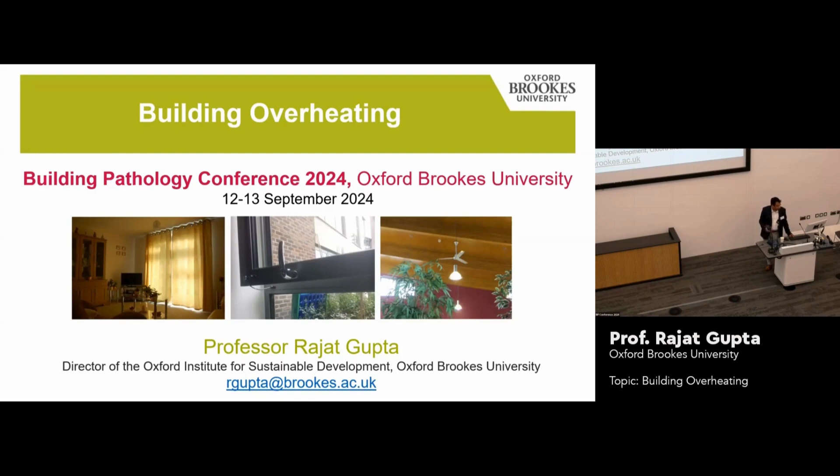I've been researching this for many years now, and I'd like to share some of those findings. I'll give some background on what overheating is, try to define it and give you metrics. Interestingly, we don't have a consensus on overheating yet, on what the definition is exactly. I'll take you through some research, then talk about some measures for tackling overheating, and suggest ways of integrating and assessing overheating risk through building pathology, because I think there's a very strong link now between the two.

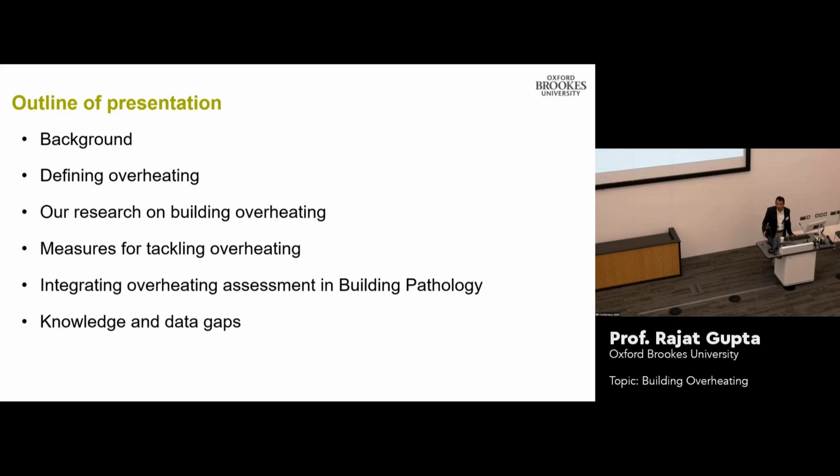I come from the field of building performance evaluation, and it's great to see Bill Bordass sitting just opposite me - I've learned a lot from him. We've applied those approaches to building overheating as well. I want to end with some knowledge and data gaps, because you're here for a couple of days and it's worth thinking about what gaps we need to address.

I run the Oxford Institute for Sustainable Development, and I'm leading the low carbon building research group. One of our areas of work for nearly 15 years now has been climate change adaptation, and what we try to do is focus on building overheating there.

We measure and model the risk of overheating, currently and in the future, both for retrofitted and existing buildings. We try to understand the factors that affect overheating - whether they are physical factors, human factors, or institutional factors.

Apart from studying homes and offices, over the last 8 years I've been looking at care homes with colleagues in University College London and London School of Hygiene and Tropical Medicine. Recently, and even now, I'm seconded partially to the Ministry of Justice to look at prisons - again a very hard to reach, difficult setting where the links between overheating and violence become very important.

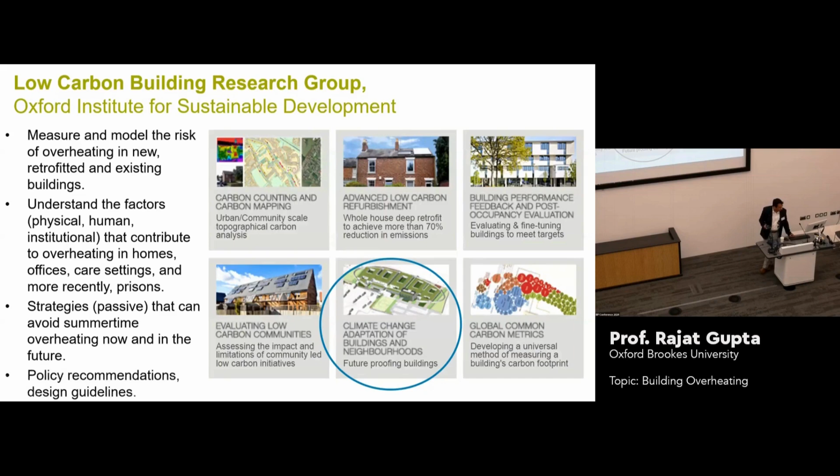So this is, as I said, a very key risk for buildings and for population groups, and we suggest strategies to tackle overheating. Being an architect, I'm all for building-related passive design first, not air conditioning at all, obviously - now and in the future - and then we look at policy recommendations and design guidelines.

We've had a body of work, and I'm mentioning that because some of you might be interested - there might be PhD students here who want to go through some of it. We started a journey in 2009 with an EPSRC project on climate change adaptation of suburban neighborhoods, where most of the UK population tends to live, looking at how you adapt those in Oxford, Bristol, and Stockport.

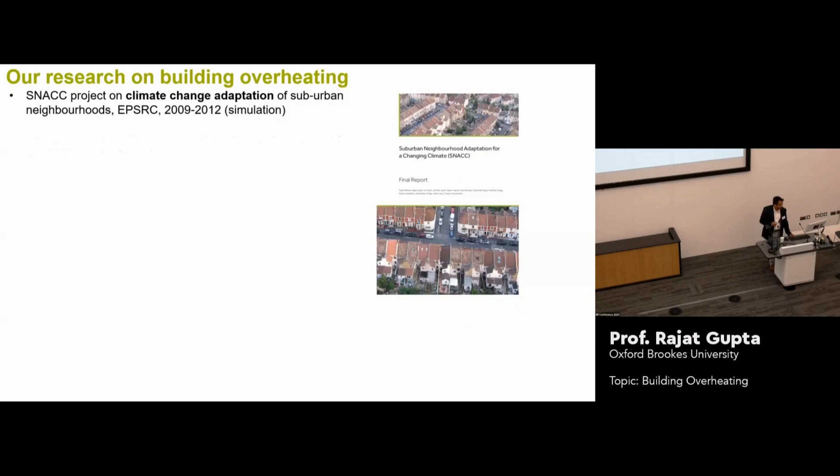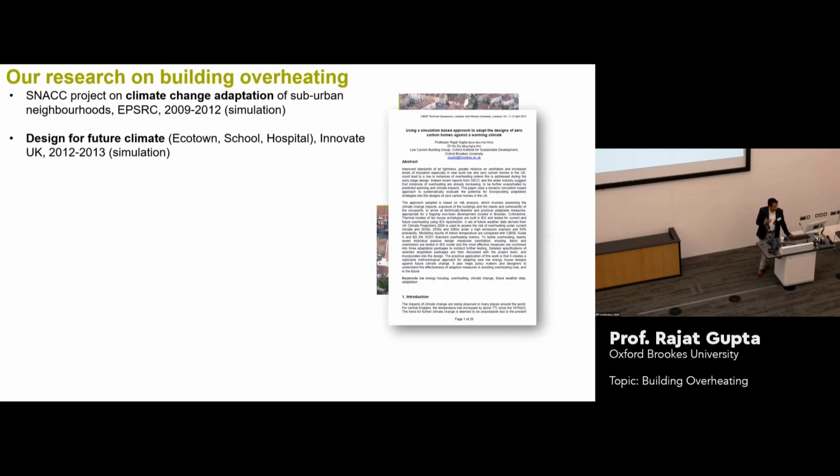We used some of that knowledge - some of you may be involved in the Innovate UK Design for Future Climate program, which I thought was very visionary because it brought a number of stakeholders together thinking about these issues right at the design stage. We worked with Bristol Ecotown, hospitals, and schools, trying to design them with climate resilience integrated.

We started to look at empirical assessment of overheating across social housing, for example, through a building performance evaluation program, and then moved on to care and extra-care settings. The care sector is really important because most of the deaths that occur during a heat wave are amongst older people above 65 years, and most of them are based in care settings - a very vulnerable sector that gets disproportionately affected by heat.

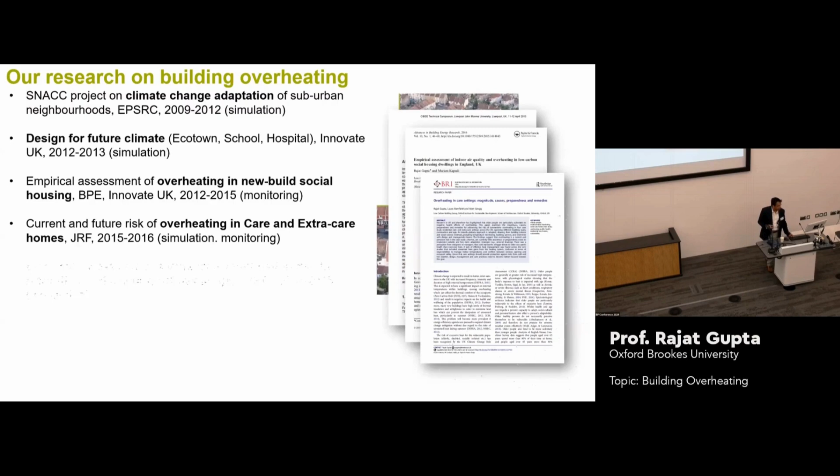We've also been looking at what happens in retrofitted and existing dwellings, because sometimes insulation without ventilation can lead to more problems than solutions.

We also have probably the largest care settings project, working with UCL and LSHTM, where we have the national stock of care homes. So if any of you are designing care homes or interested in it, there is a building stock model now. We've monitored 50 care homes just after COVID. Currently I'm involved in overheating prisons, and we're starting a new project looking at extra care settings, linking heat with health. That's the main focus now.

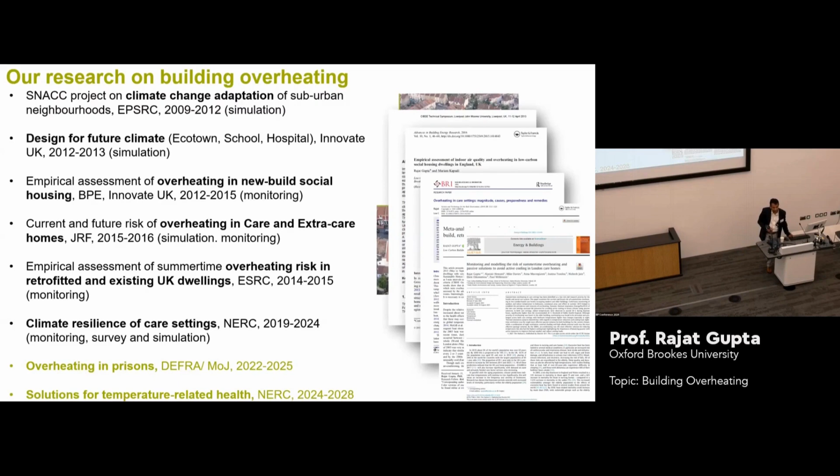We also have potential good news about a very large grant, which unfortunately I can't announce because UKRI hasn't announced it yet. But there will be a lot of work happening in this space now, especially linking these aspects.

I want to touch upon why this matters, why building overheating has been put right at the front of the agenda of the conference. Because overheating, both in new and existing dwellings and buildings, is increasing even in temperate climates. I think there is a myth that in the UK, which is a heating-dominated climate, summertime overheating doesn't matter. Actually it does. In fact, in care settings we are even observing wintertime overheating, and this is a major issue. And of course that has energy wastage and other net zero implications. Changing climate will make it much worse.

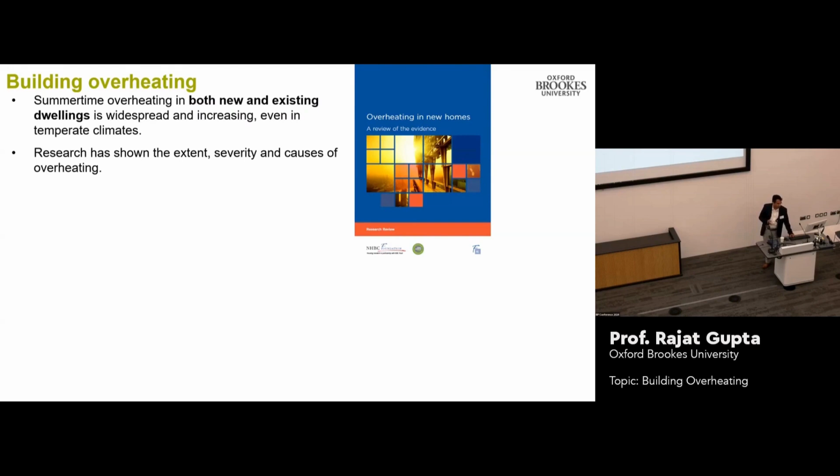We know that the extent, severity, and causes of overheating are being researched. This will become, as I said, with a warming climate, much worse. A number of reports from BEIS and ARUP are emphasizing this. A recent BEIS report said that domestic stock will require 75 to 85% of cooling energy consumption if it is not adapted for overheating.

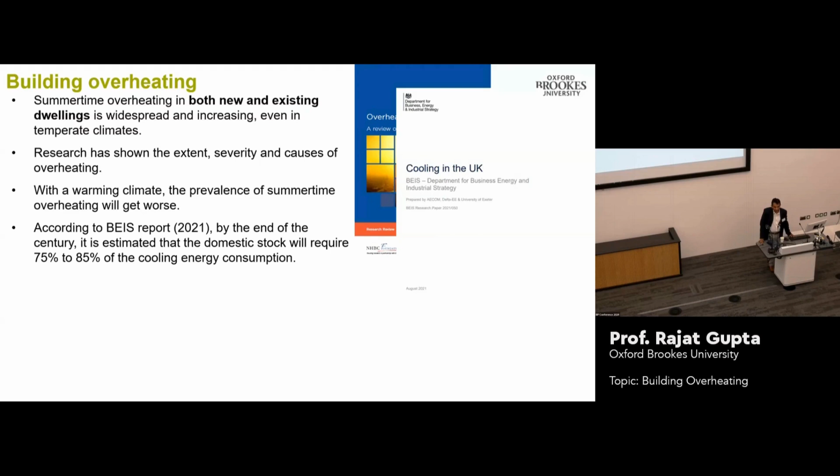When we had the summer 2022 heat wave in July, UK energy use rose by 5% during the peak period, which is quite alarming, because if that continues, you can imagine we are in a very different state. A recent ARUP report said 9 out of 10 UK homes will overheat if there is a 2-degree warming, which is probably happening now.

We're already at 1.8 degrees, so this isn't the future, this is probably the present. We know smaller houses and flats are at greatest risk. And most importantly, overheating is a public health issue. This affects mortality, it affects morbidity, and the elderly and vulnerable population - the very young, the very old, those with underlying health conditions, pregnant ladies, those occupying captive environments - are most affected.

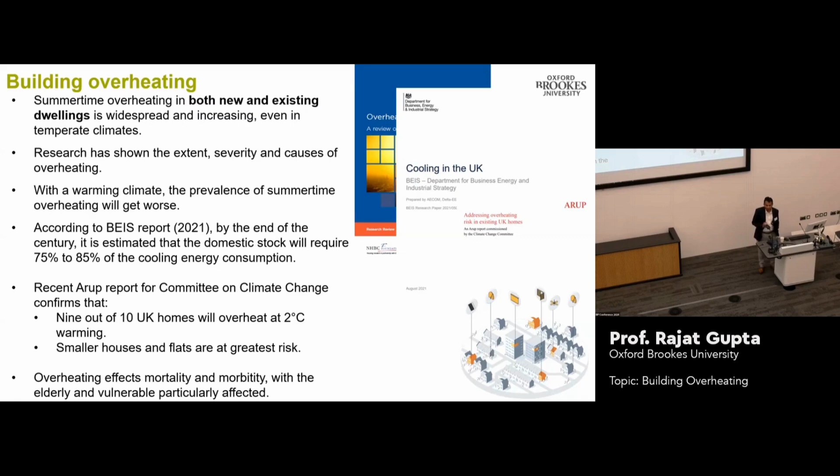There's a link between overheating and energy retrofits, because although we should do that for net zero and other reasons, this can sometimes accentuate the risk of overheating if not done properly. If there's not adequate ventilation, if you have single aspect with communal heating systems which are not well insulated, and of course lack of shading is a big issue. Even homes nowadays are going up without any shading whatsoever - and I mean external shading here.

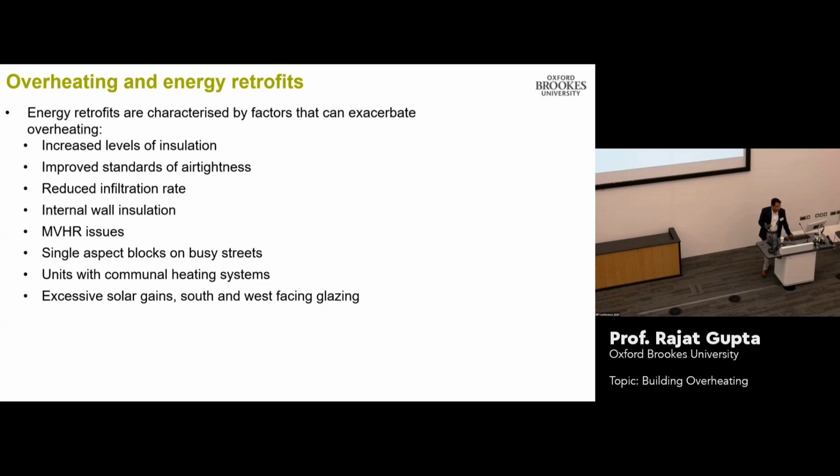We know there's some work here, some guidance, primarily looking at new build, in building regulations, Part O. The Committee on Climate Change has very clearly said that there is little incentive still to retrofit adaptation measures to reduce overheating across the building stock. So hardly any retrofit projects ever look at climate resilience. I haven't seen one - if you have, please let me know. It's very rare, and this needs to be built in.

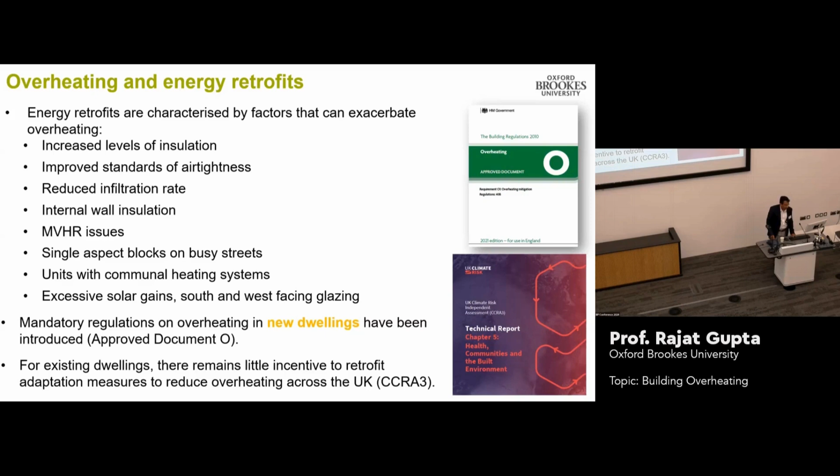Now, as we start on this large-scale transformation of our building stock, despite all this, we don't have a clear definition of overheating. There are a lot of metrics, but there's no consensus. It has come from the work of Fergus Nicol, who is a leading light in comfort. So the absence of comfort, or the presence of discomfort, has been seen as overheating, using the thermal comfort field studies work. There are lots of other guidance now.

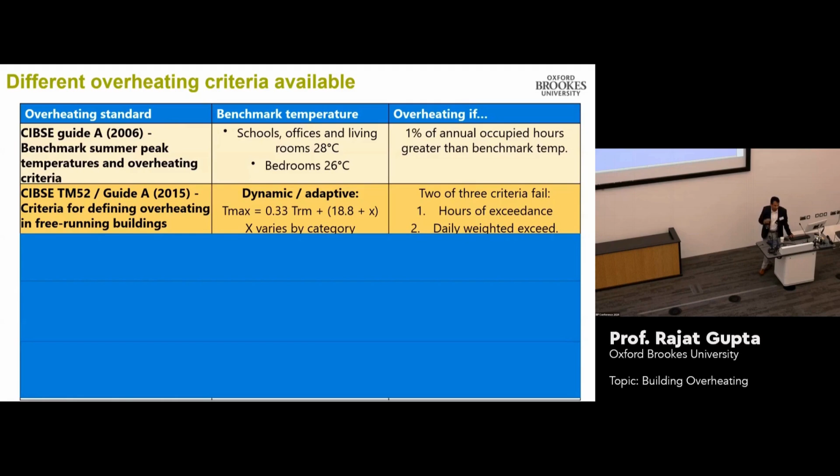You may be aware of CIBSE Guide A, which talks about static criteria - offices, living rooms above 28 degrees, or bedrooms above 26, for a certain percentage of occupied hours are deemed to be overheated. There's more dynamic criteria because buildings perform as per outside temperature. So there are criteria based on TM52, which looks at the indoor threshold based on the running mean outdoor temperatures, and is more forgiving, looking at hours of exceedance as well.

SAP has still got a very basic criteria of overheating assessment. The Passive House Planning Package looks at 25 degrees and 10% occupied hours, although that's also being reviewed now. And there's the Housing Health and Safety Rating System, which also has that 25 degree threshold. From the UK Health Security Agency, 26 degrees is what is seen as a threshold.

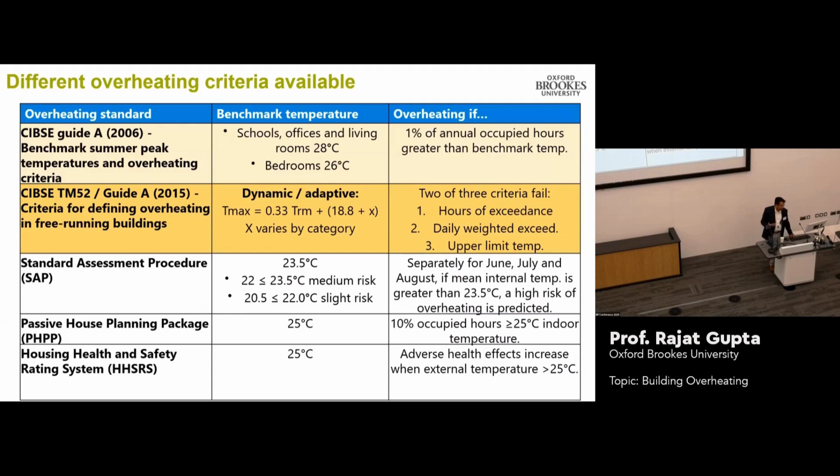But that cannot be used for all vulnerable settings. In an environment where people are in rooms for 18 hours a day, or in settings where people are bed-bound, 26 degrees might be too late. We might need something different.

So at the moment, what tends to be widely used is this guidance called TM59, which is really saying that overheating is based on comfort in living rooms and bedrooms, so that sleep is not disrupted. Sleep has become a key indicator because bedrooms have been found to overheat quite a bit. And they have two slightly different criteria. Bedrooms use the static criteria because it's related to sleeping, so you're not able to adapt that much.

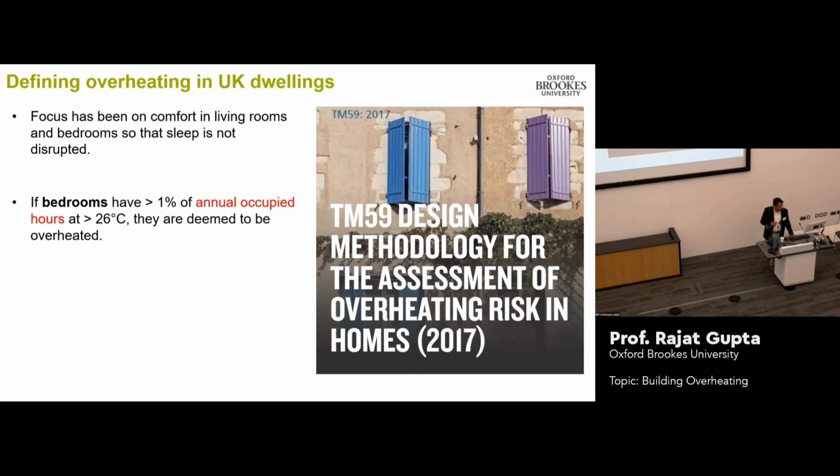What it's saying is that if 1% of annual occupied hours are above 26 degrees Celsius, they are deemed to be overheated. For living rooms, it tends to be more dynamic, using the criteria of internal temperatures being determined by outdoor temperatures, via the running mean outdoor temperature. If 3% of occupied hours between May and September exceed this threshold, the space is deemed overheated. So essentially, it's putting in some adaptation measures that could apply because you're in the living room and probably awake. But in the bedroom, it tends to be slightly more static. So those are the ones that tend to be mostly used.

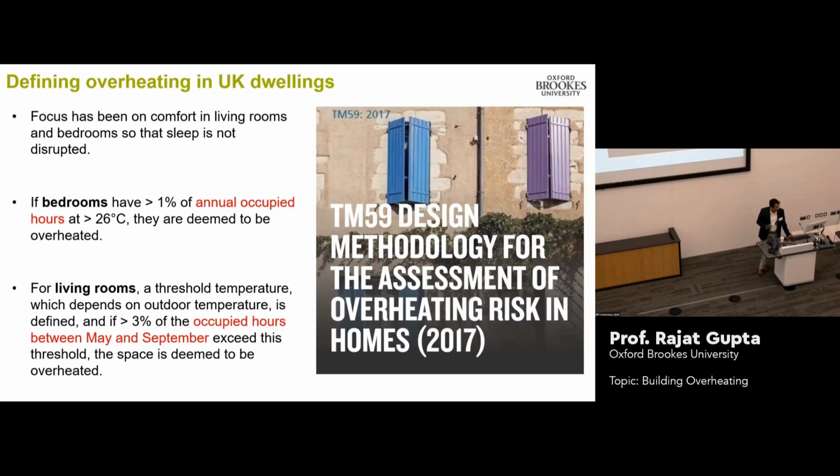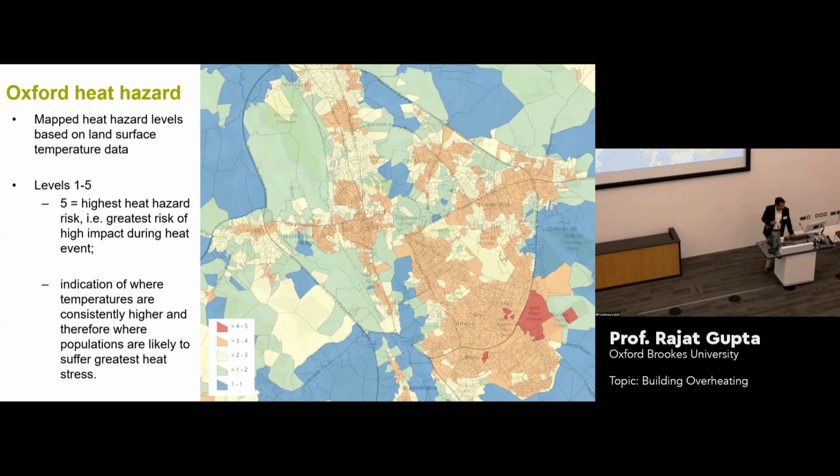Oxfordshire, I was told, had 65 deaths, not this summer but in summer 2022, excess deaths due to the summer heat waves. We've also been predicting what happens in the future.

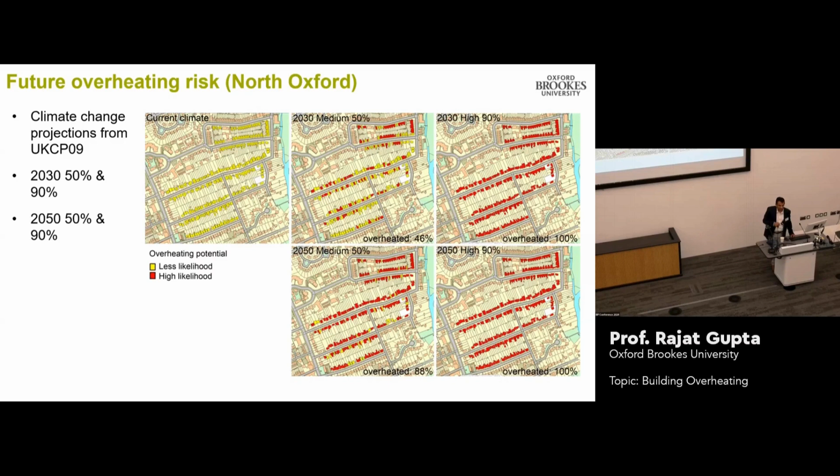Looking at North Oxford, the red shows which homes will overheat as we go into the 2030s. This is using the high emission scenario from UKCP09, which is probably much conservative—it's probably happening now, everything is getting overheated. So this is a current risk and is going to get worse in the future.

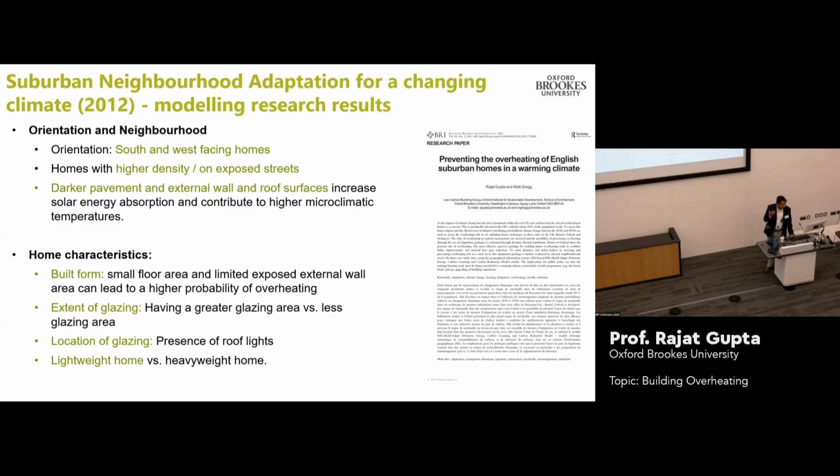We then looked at what kind of buildings will overheat. We know some of this already: southwest facing rooms without shading will definitely overheat. Homes with higher density, exposed streets, darker pavements, greater glazing area, presence of roof lights, and lightweight construction will probably overheat more.

Mid-terrace houses were found to overheat, and 90% of bedrooms that we monitored were overheated, which is why you see a lot of guidance related to nighttime temperatures and bedroom temperatures now. Insulated dwellings without adequate ventilation had twice the chances of getting overheated. I'll show you the kind of graph that's now published.

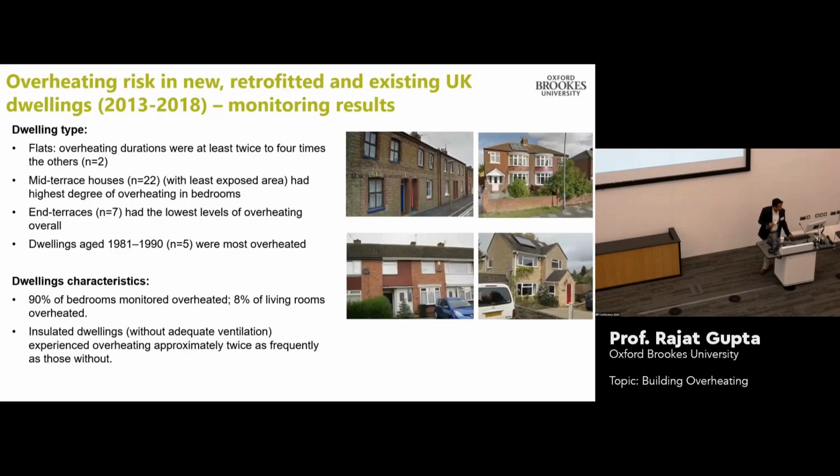You can see the homes which are insulated but have no ventilation done properly have a higher chance of overheating. So I'm not saying don't insulate—I'm just saying, as Peter Rickaby tells us, no insulation without ventilation. I think that's absolutely vital.

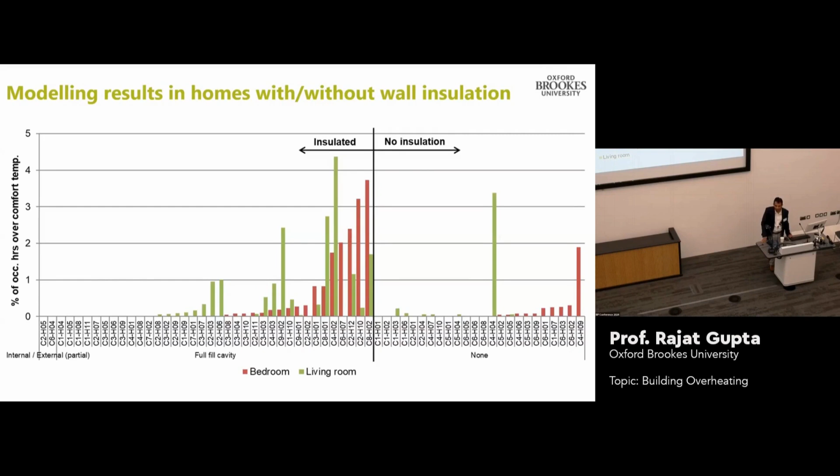Then we looked at some homes in Oxford recently. These were social housing dwellings studied longitudinally over 2021 and 2022. Again, similar results came back, so this problem is probably growing and becoming much worse now.

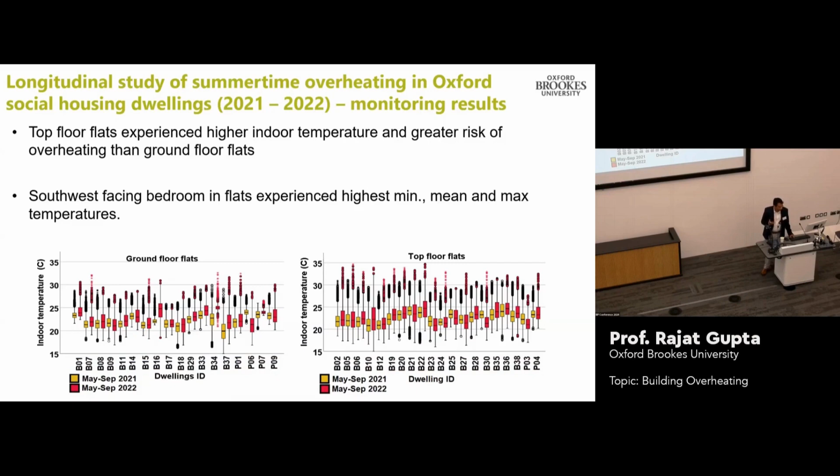I'll talk a little bit about a project I've been involved in for quite a few years, called ClimaCare, which is looking at a building stock study of care settings. As I said, older people get most affected, and we are working with health scientists to quantify the health risks of overheating.

So not just measuring temperatures inside rooms, but also taking core body temperatures and trying to relate how the room temperatures relate to core body temperatures for older people and for staff. We're also interested in working in environments that are hybrid, so you have office spaces, such as in a care setting, and also residential spaces, and how do you deal with those differing needs of people?

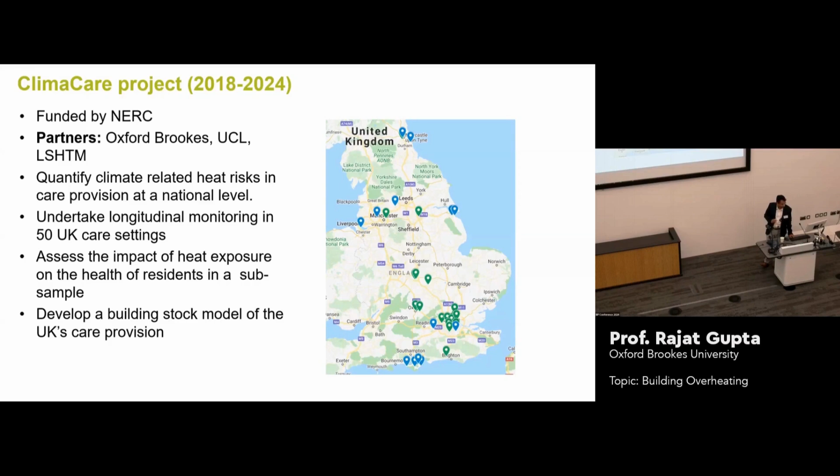We managed to collect data from 50 care settings across the country. This is probably the study, and the data is now published in UK Data Archives, if somebody's interested. The impact of heat exposure on health of residents was then looked at by London School of Hygiene and Tropical Medicine, and some very interesting results have come. We then produced the building stock model of the UK's care setting stock, and you can see some of the bits that we found.

There's growing awareness now about extreme heat, but much more needs to happen in the building sector.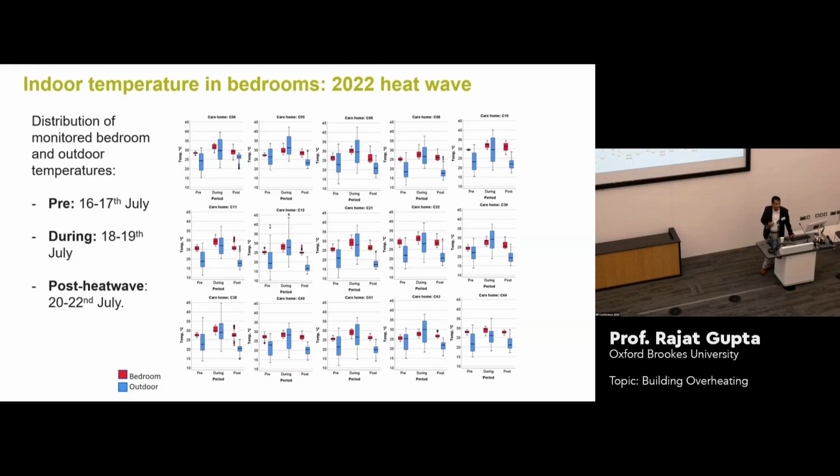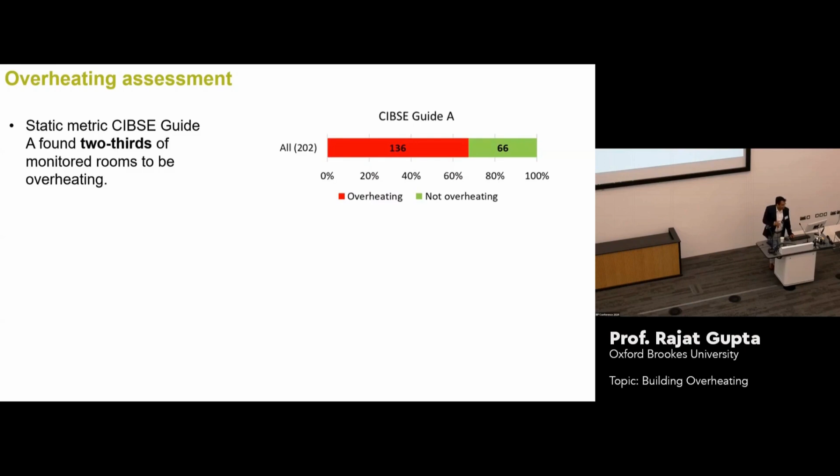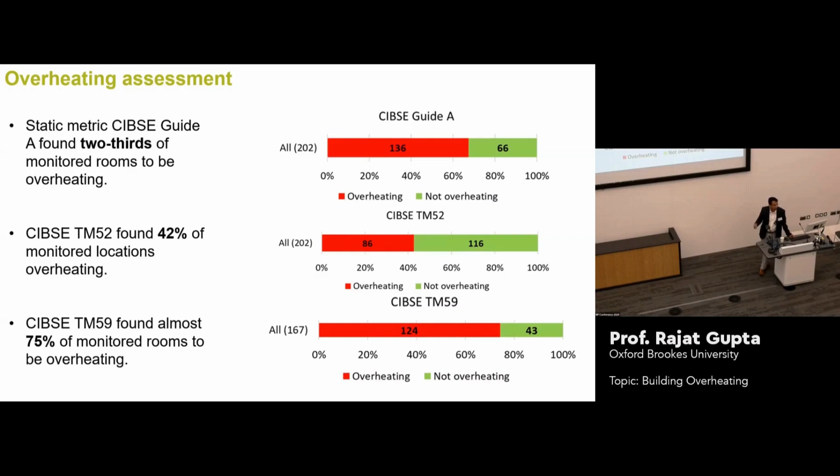We looked at different ways of assessment. For those of you who do overheating assessments, there are various kinds, so we thought we'll apply everything that we know just to see and make sure. There are over 200 spaces being monitored across this project, and the red shows that two-thirds of those overheat. If you use the static criteria, the dynamic criteria brings it down a little bit, but then if you use the TM59, which is what is widely used, about 75% of spaces overheat. So whichever criteria you look at, overheating is prolonged, prevalent, and intense, and it needs to be tackled at the design stage, operation stage, and throughout the building life cycle. This is becoming really important now.

We also looked at what people thought about it, because that's quite important. In a care setting, you have care staff and you have residents, and we wanted to see what is their perception of overheating or heat generally, and some interesting results came by. This is over 2,000 surveys, so it's a large sample, and we did it over 2 summers - not just when it was very hot, because obviously everybody's going to say it's very hot. We also did 2023, which was a more representative summer.

What we are finding is that there is a marked difference between what residents think about it and staff, and staff are feeling quite hot. If you look at all the 3 charts, you can see staff feeling much hotter than residents - they were less likely to find temperatures bearable and more likely to be cooler. This is a problem because essentially older residents are not sensitive to heat due to their own metabolic rates, which means some external input is necessary to manage overheating. This is probably one of the reasons why deaths occur in care settings, because that threshold gets crossed within the core body temperatures without the older population realizing it.

And hence the need for the health study that is also happening as part of this project. What it's showing is that designers and engineers need to manage different aspects of heat, where one group wants to be cooler, another is fine, but actually they're not. Both need to be managed differently.

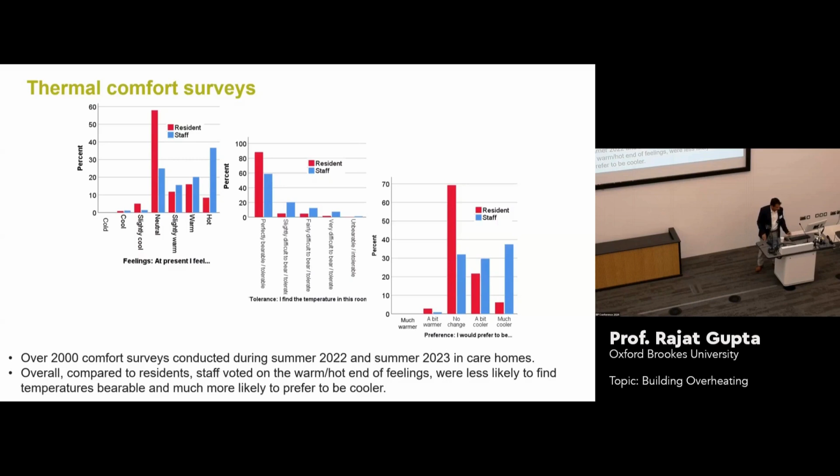I'm now going to show some of the climate resilience measures, because that's the problem. We know this is a problem that needs to be tackled. I'll also talk about what's been shown in the Arup report, which modeled some housing archetypes, based on modeling results. Their findings are no different from what we've been writing about for many years, is reduce solar gain.

So shading is important. There was a shading guide produced, I think, by Good Homes Alliance and Building Performance Network, and essentially that's more effective in flats than in houses. Solar reflectivity of walls and roofs needs to be looked at. Increasing openable areas of windows has the greatest impact on nighttime ventilation. Obviously security, pollution, and noise matter here, and all those criteria need to be addressed.

Ceiling fans were seen to be inexpensive, but again we need to look at the floor to ceiling heights within flats, whether that's a viable solution. Roof insulation was actually a good thing, but where there's no insulation, like in certain bedrooms, they were more prone to overheating.

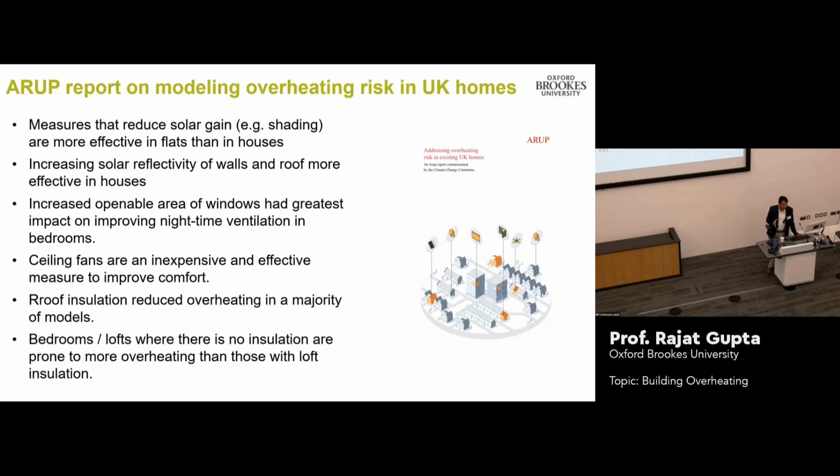So essentially it's showing that passive measures can do quite a bit, which is why I always say passive first in our climate resilience, in adapting our building stock to overheating. We have to follow the passive first approach, wherever we can: presence of cross ventilation, enhanced window opening, external shading, shallow plans, light colored surfaces, corridors that are adequately ventilated, along with neighborhood level strategies as well.

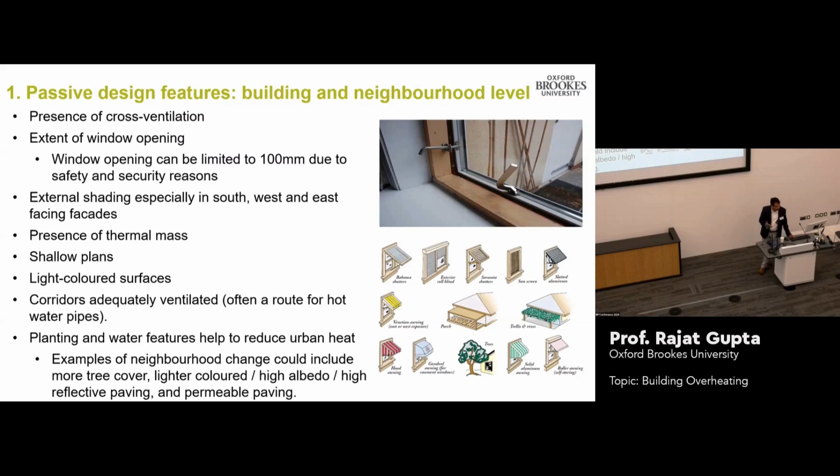Overheating cannot be tackled just at building level. It's not possible because you're getting a lot of gains from outside. So looking at green and blue infrastructure, nature-based solutions is absolutely vital, and looking at high reflectivity surfaces as well and permeable pavings. So it's a building and neighborhood level approach that we need to tackle overheating.

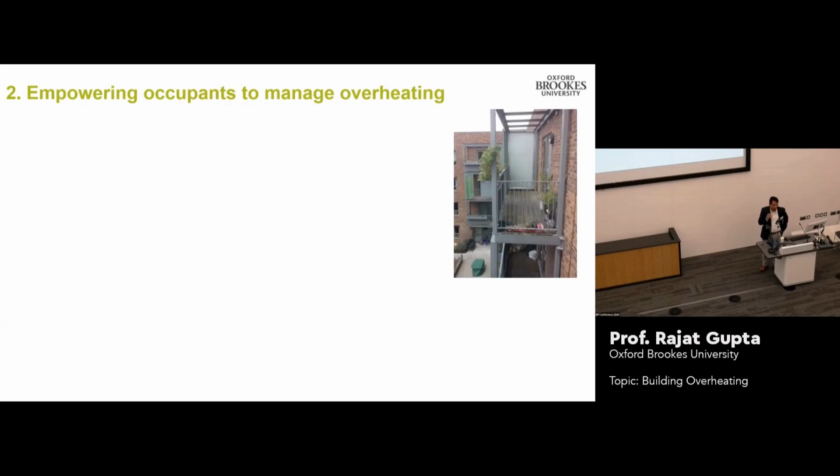But at the same time we shouldn't forget occupants, because overheating also affects people and can be managed by people if enough awareness raising and education is there. So when we're talking about shading systems, we need to make sure they're intuitive, accessible, and can be used by different population groups. Do we need windows at different levels? Older people may not be able to use certain kinds of windows, but others could.

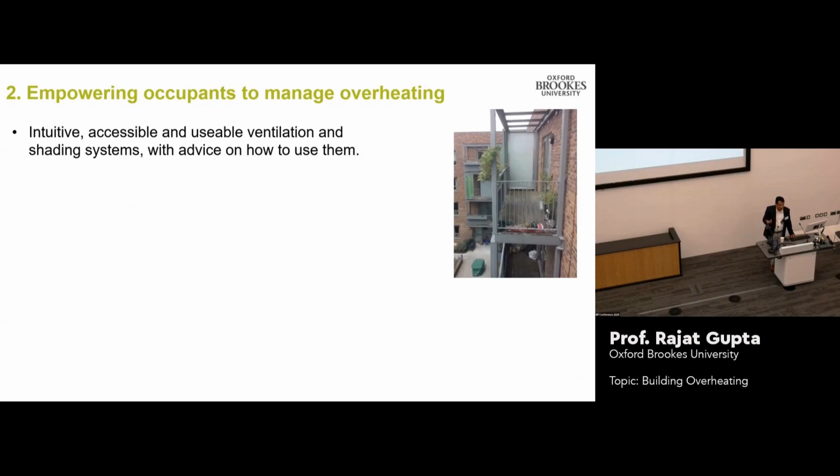In prisons, where I tend to work, you don't open the window that much. So how do you tackle that? You can't put shading - something that's just not possible. So you have to really go to the drawing board for that.

It's really important that we have some area where people can get to, like shaded balconies or other communal spaces where people can escape from heat. In the care sector and other sectors, UK Health Security Agency suggests there should be a space below 26 degrees which people can get to. It's a great solution, but the problem is some people are bedbound, so you can't move them to a cool room sometimes. So we need to look at adapting those spaces as well.

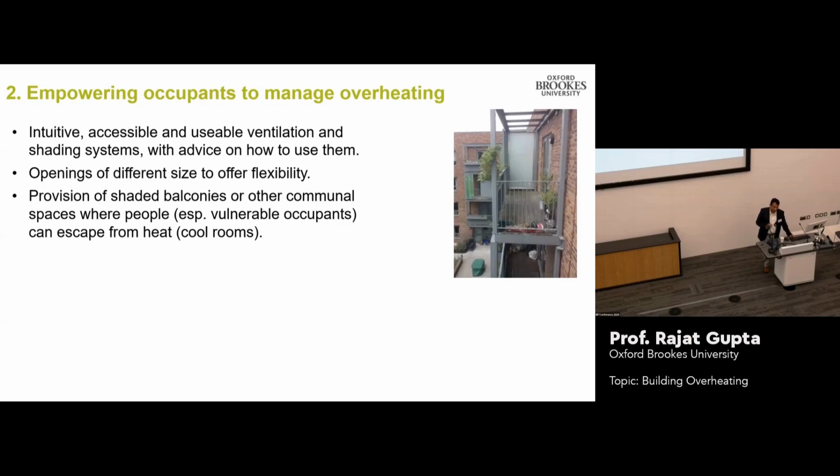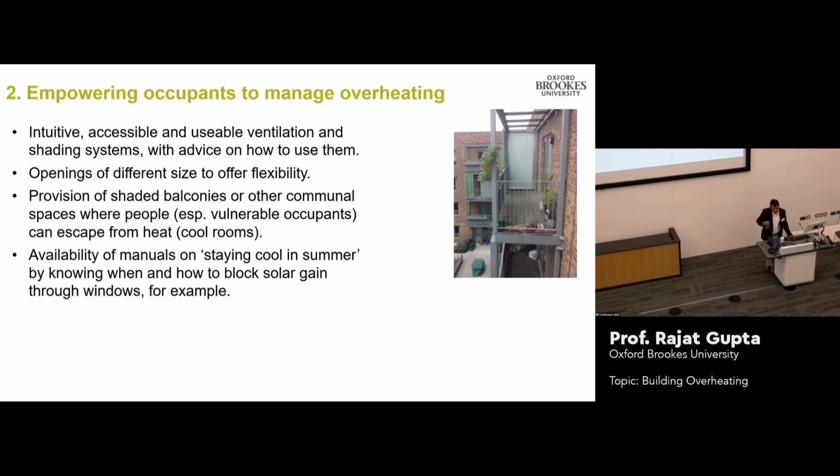We also need guidance. I know Oxfordshire County Council has now got guidance on Beat the Heat, which are manuals on managing heat in summer, staying cool in summer, as much as staying warm in winter. That's really important, because when the heatwave happened in 2022, I was asked to give advice on public media, and I was saying close the window when it's hot. That was just against what you would normally say - you're going to open the window if it's hot outside. That's quite counterintuitive to what we would say.

And the other thing, which is going to come again in a slide as I show, is temperature monitoring. I think that's really important. We need to start seeing those smart systems now being used to our benefit, so how they can become alert systems, so we can alert people that this is going to be a problem and how you can tackle it.

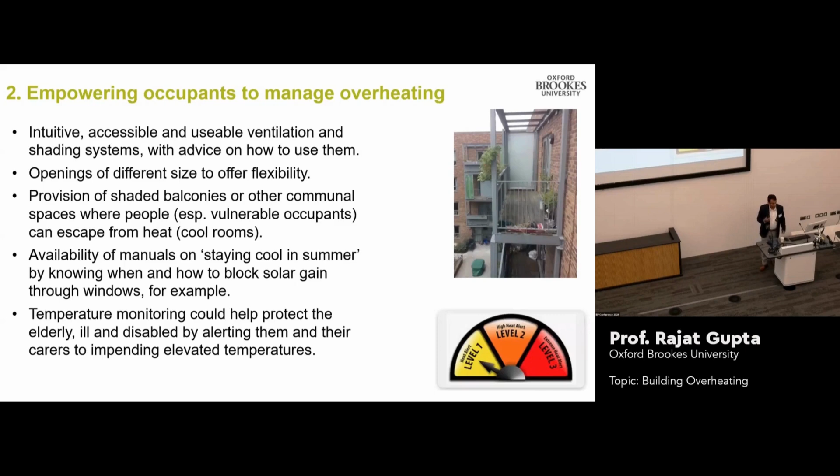Tracking overheating is important. Dynamic thermal simulation is what I would suggest, because that's more robust, but obviously not every practice, not every firm is going to do dynamic thermal simulation for every building. I'm going to suggest an approach for that later on. But I think there's a role for building pathology here in terms of inspections and measurement. When you're doing your visits to inspect buildings for other kinds of failures, whether it's moisture related or others, I think it's worth building a checklist for overheating as well, because that's where I think we are lacking completely. And I think we need to build that capability across the sector so that every building can really be inspected, because this is a problem that will affect all of us.

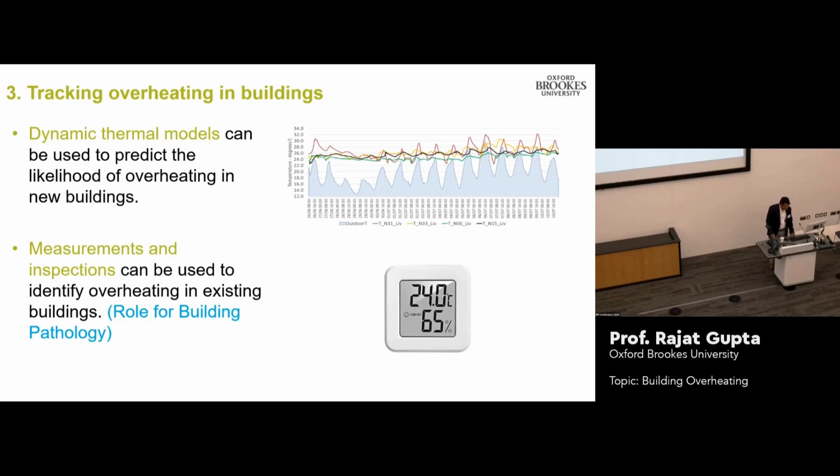I'm going to suggest some ways of incorporating this within the building pathology techniques, and let's see what the kind of reaction is.

So first, you may have come across this. Good Homes Alliance has developed a tool in collaboration with us on looking at existing buildings, and it's a very simple overheating checklist. It doesn't require modeling. So what we were saying is that every building needs to do this, because you can determine whether your building is low risk, medium risk, or high risk. And it tells you where you're located, whether there is enough green infrastructure around, what are the orientations of the facades. And then it gives you a quantification of that risk. It's freely available, I think it is. Yes, it is freely available because the university was involved, so it probably has to be.

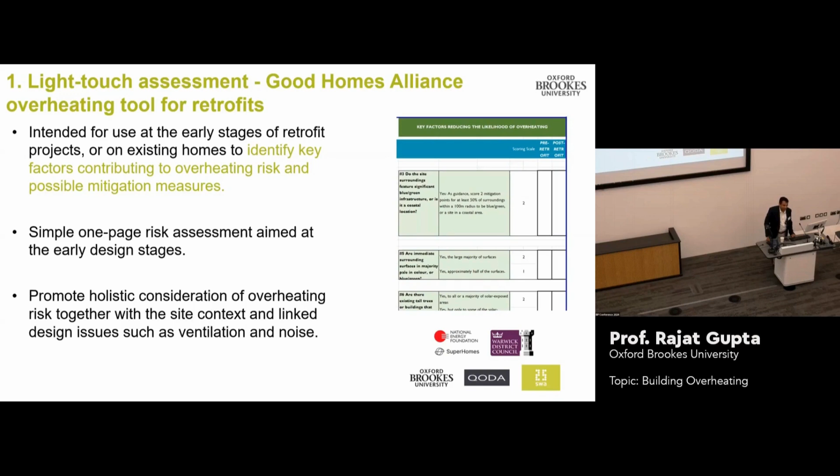As a one-page risk assessment, which you can do at the early design stages, you can also apply it for existing buildings, I think. And then where you start to get issues or the building is more vulnerable—so let's say you're dealing with a care setting or an extra care home or west-facing facade—then you start to do detailed assessment of overheating risk for those buildings.

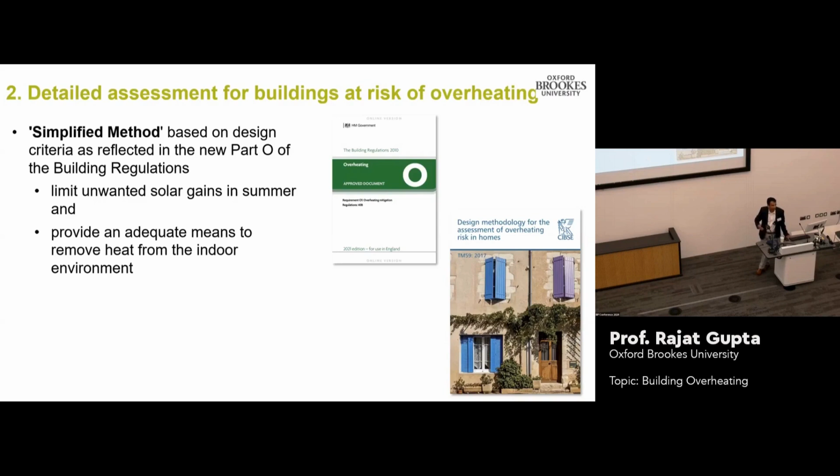I have to talk about the simplified method because that's what the government suggests: limiting solar gains and increasing ventilation. But what I am actually saying is use dynamic thermal simulation for those buildings which are high risk. So I'm not saying do that for all.

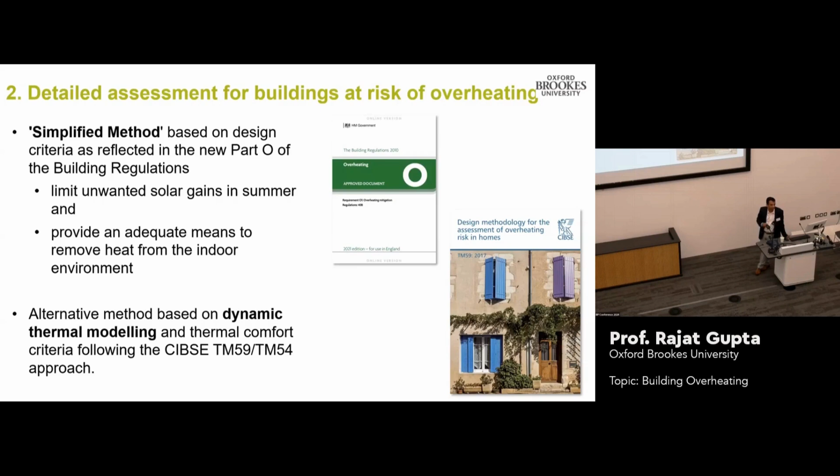So this is where we need to be. And I think there's a role for universities here where we need to provide that training as well in these software and in these techniques so that this can be widely used.

Then I think, as I mentioned, indoor temperature monitoring is important. Previously when we were doing building performance evaluation studies, monitoring equipment used to be quite expensive, several hundred, sometimes thousands of pounds, but now it's much cheaper. And although those low cost sensors may not be the most accurate, they'll give you the trend, and I think it's important to utilize them to our benefit.

At the moment, our heat health alert systems are based on outdoor temperatures. I know it sounds strange, but that's what it is. The Met Office uses outdoor temperatures across different areas to declare if there's a heat alert. I think now it should, because buildings are seen as modifiers of heat, we need to look at indoor temperatures as well. So it may not be that hot outside, but indoors you might have 30 degrees, even if it's 18 degrees outside, because of internal gains and other things that are happening with solar gains as well.

So what I am suggesting is that we have an indoor temperature monitoring and alert system, especially starting from vulnerable settings. So we can alert both the residents and their carers, for example, and then when certain heat thresholds get passed, a warning is issued, so action can be taken quickly. And I think that will enable a lot of remedial work to happen before damage gets done.

I think we are lacking there, and a lot of data does get collected now indoors, but we are not using it to create those alert systems. We can even have a next day forecast or even a next week forecast. It may not be the most accurate, but it's better than what we are doing now, right? We are using outdoor temperatures, which is fine because that's the data we have, but we need to now move into indoor as well.

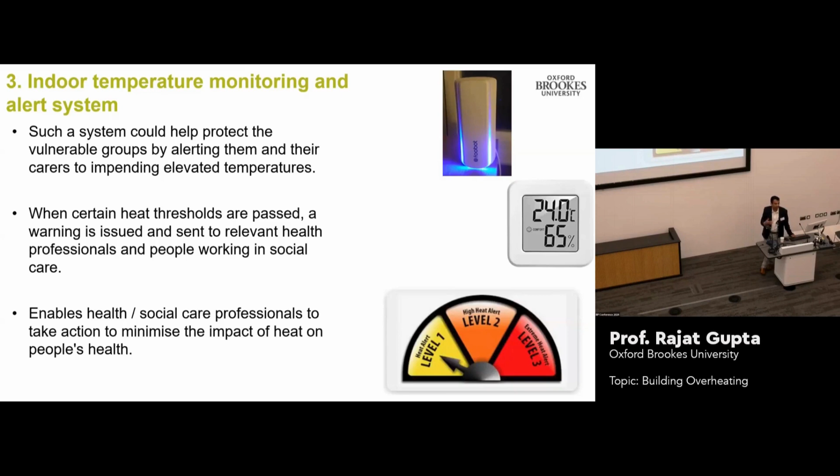That relates to indoor air quality as well, where most of the regulation is on outdoor air quality and very little on indoor air. The same argument applies for indoor temperatures. Last but not least, I think the occupants, and probably this should be the starting point, need user manuals for managing homes in summer. That's really important for raising public engagement and awareness about opening windows, using fans, turning off unnecessary equipment, and even cooling specific rooms within the home.

It might be that you can actually move downstairs when it's very hot upstairs. So those kinds of manuals are absolutely important. We may need to air condition certain buildings which are very vulnerable, but maybe for a very short period of time when we need it. Most of this can be tackled through passive means.

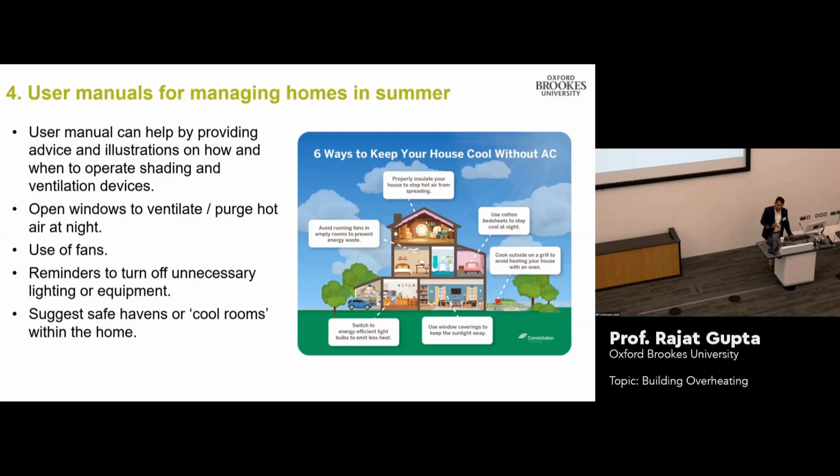I think I'll probably be running out of time, so I'll talk a bit about knowledge and data gaps and then open it for discussion. I believe regulations and supporting guidance are definitely needed to ensure that all this large-scale retrofitting we're talking about incorporates climate resilience. We can't have buildings being built today that will need to be retrofitted for overheating in the next 5-10 years. That doesn't make sense from any perspective.

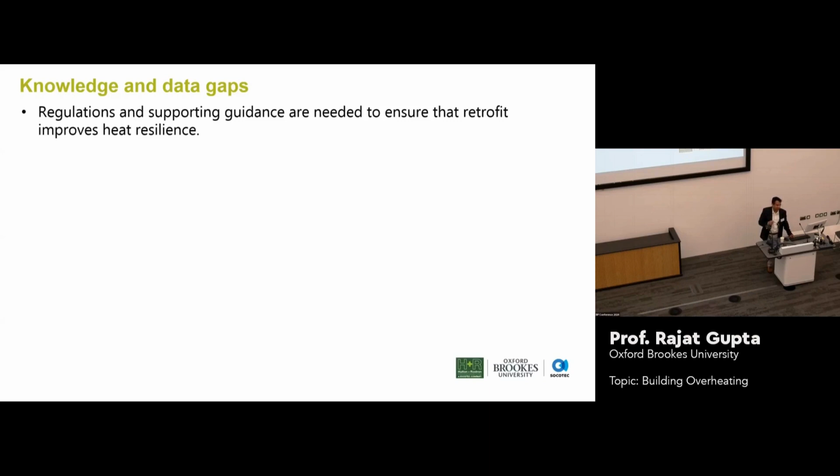So we must make sure that new buildings definitely, but also our existing stock, whichever is going through retrofit, has that guidance. And that is lacking at the moment. The Committee on Climate Change has been shouting about it for many years. Integrating passive cooling provision, whether through shading or ventilation, is absolutely vital.

I think what we also have is limited evidence on the impacts of these retrofit measures. Where buildings have had shading systems or different kinds of overheating resilience measures, there is hardly any empirical data to show that those are having an impact and effect on the building, but also on the people and their health, well-being, and productivity. So this is a major issue.

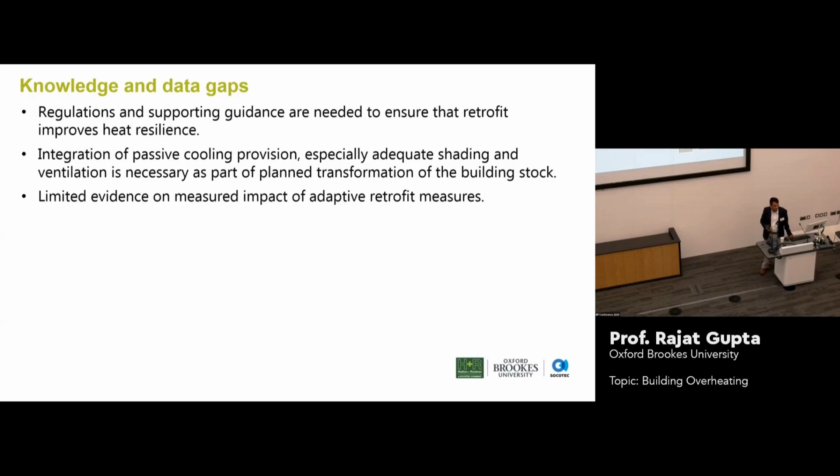As we start to work from home more, overheating affects us as well because you're at home and it could be very hot. Designers have to anticipate future climate conditions as well as social changes that are occurring, like people staying home and daytime occupancy increasing, especially for new buildings that may last hopefully even 150 years or more. So they will be in a completely different climate. We need to be mindful of that.

Again, very few designers are doing this for future climate. If only 3% of people are looking at it, you can imagine how few are looking at this risk for buildings coming today.

I also think we need to have a repository of the number of buildings that have adapted to overheating. We have no idea how many buildings in the UK even are adapted and resilient, ready for overheating. And we need that.

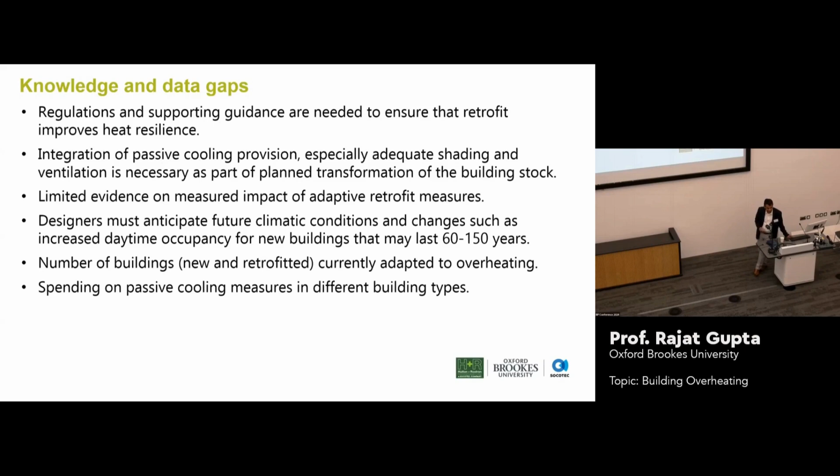We also need to understand what's the spending on passive cooling measures. Is there any? What is the cost benefit of doing that? In the care sector, we have to look at avoided costs or lifetime years saved as a result of putting in shading. It's very difficult, because in a care home, how could you demonstrate that? But working with health economic experts, I'm realizing how important that is for doing evaluations. We don't have any knowledge of that at the moment. It'll be nice to hear if somebody has actually quantified that.

Finally, I'd say indoor temperature monitoring needs to be done. It's low cost, but there is still a lack there. We don't have a monitoring protocol—people install things wherever and however they want, which is also a problem. We don't have a method for interpreting those measurements in a consistent way. Being an academic, I like to see robustness, consistency, and rigor—not making it more detailed than it needs to be, but it needs to be consistent.

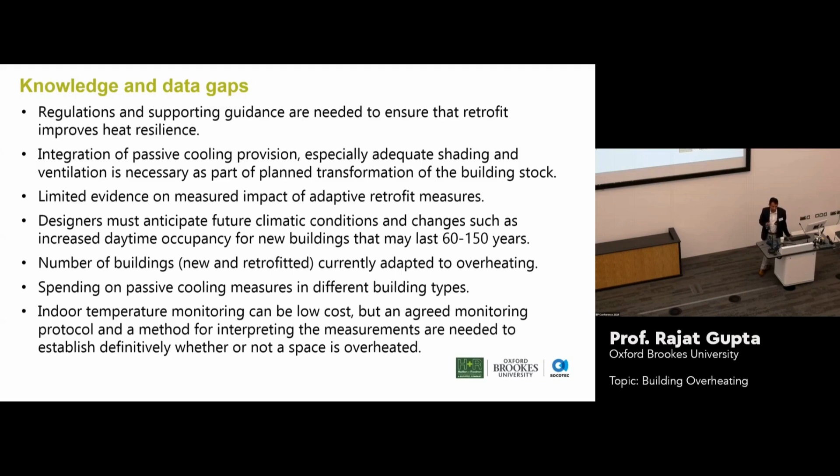We need to establish in a definitive way whether a space is overheated or not. I think that's where the role of building methodology comes in again, because establishing those techniques and consistencies is vital so that everybody measures the problem in the same way and we can tackle it consistently. I'm going to end here—I think I'm done, and I'm happy to take questions. Thank you for your attention.